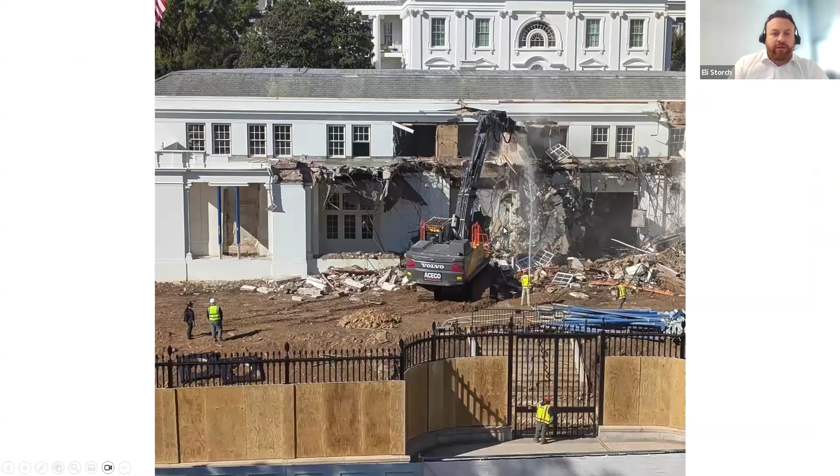George Claflen, can you unmute? Oh my gosh, no, this is great. George, you're muted. I'm on mute, all right. Oh, there you are, George. We hear you. You want me to talk or you want to talk, Eli? No, you go for it. Okay.

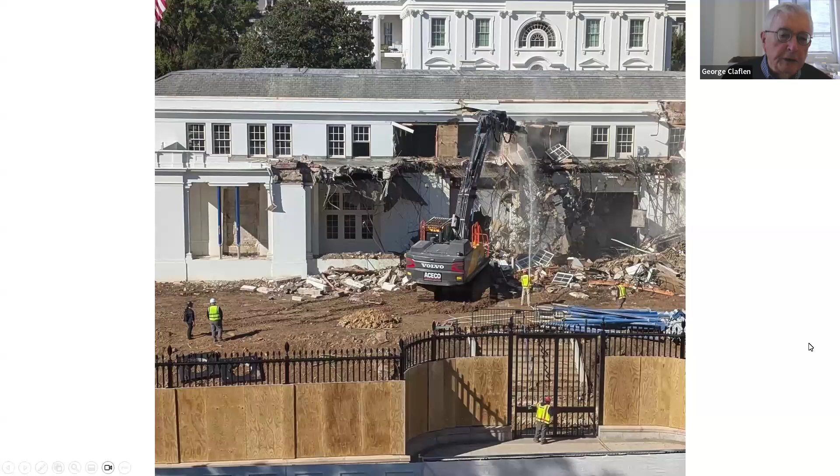I think everybody's aware of what's going on in Washington. This is not the time to debate it in some detail, but I think the physical presence of what is actually happening there is worthy of noting in our group that is so visually oriented.

I think there's another slide that shows a diagram, a very crude diagram of the East Wing. The big yellow oblong is the new ballroom, as it's called, that dwarfs the White House in terms of square footage. I think even that little oblong is less big than the actual proposed building. If the White House were in Philadelphia, I don't think they would have even gotten a demolition permit. But apparently things are not as strict in Washington as we think they are, at least when it comes to the White House. So I'll just go on from there.

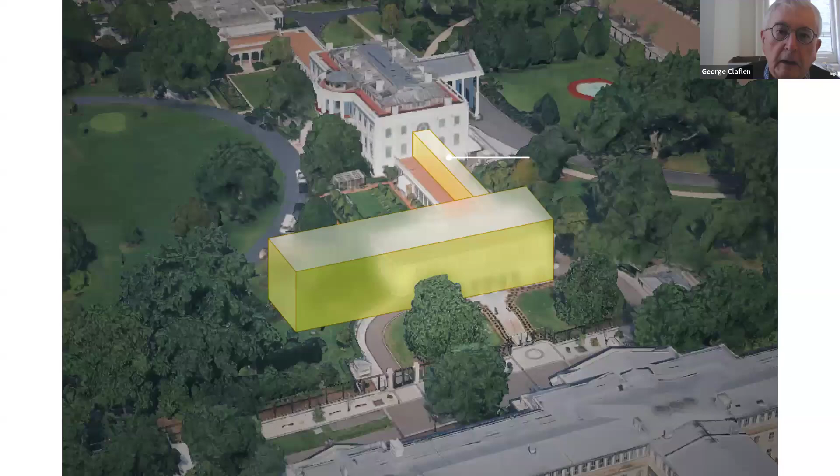Another non-visual item, very interesting, is that the mayor has basically ousted Herb Wetzel, who was the longtime planning director of council's planning arm, and was also head of the land bank. The chair of the land bank is now Angela Brooks, who came to DAG. We had a one-on-one with her in May. She is the chief housing officer of Philadelphia, and the expectation is that the land bank will be much more favorable to subsidized and workforce housing now that the leadership has changed.

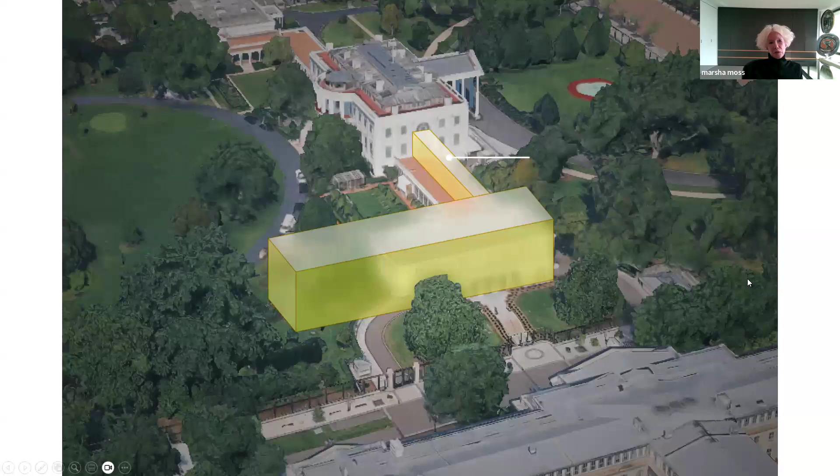Thanks, Eli. I'd like to say a few words about next month's program. The Trump administration is seeking to retell the story of America's founding, issuing an order to restore truth and sanity to American history. This is urgent because Philadelphia will host hundreds of thousands of tourists next year for our 250th anniversary, so much attention will be on our city. In his effort to whitewash American history, Trump is seeking to erase the history of slavery. The President's House educates visitors about Washington's ties to slavery and is a memorial to those enslaved there. Although it has been targeted for removal and alteration, so far the displays remain in place, fingers crossed.

The establishment of the President's House, its recent threat, and its future will be explored by our two speakers: lawyer and activist Michael Coard, founding member of ATAC, Avenging the Ancestors Coalition, and Troy Leonard, principal of Kelly Maiello Architects, designers of the President's House and Memorial. Together they'll discuss challenges to the site's integrity and predictions. The event is in person at 1218 Arch Street on November 12th at 5:30 in the evening.

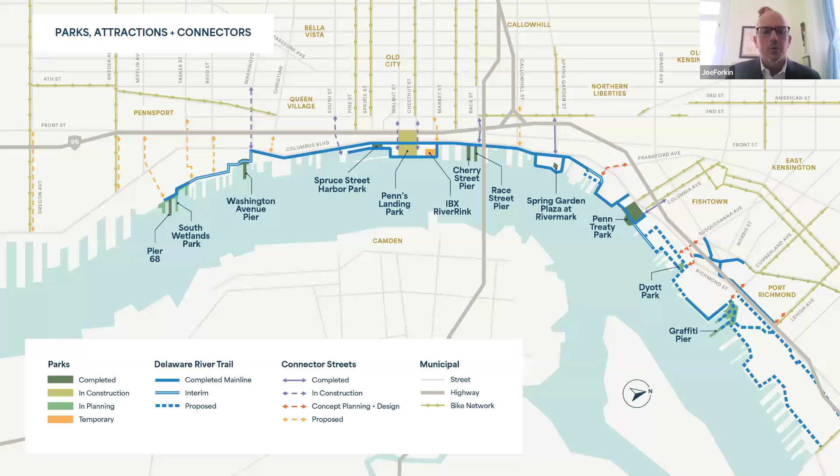By building out that public realm, we then lure private investment to the waterfront. The trail, since it's been built, has attracted about 1.7 million trips. This is amazing to me. I've been on the waterfront for 28 years now, and every park, every connector street, and every trail segment we open continues to impress me in terms of the use it receives, how it falls so seamlessly into the fabric of the city once it's open for everyone to use.

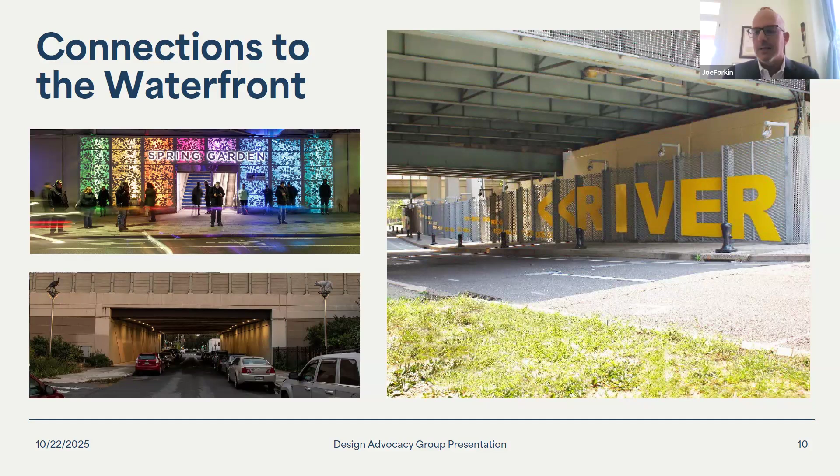And then the connections to the waterfront—before we started working here, each street, each connector was completely disconnected. It was a place you did not want to walk through. You did not know the river was on the other side of it. So this connector street program was very important in breaching that physical and psychological barrier of I-95, attracting bicyclists, pedestrians, joggers, and the upland neighborhoods back to the river, so they knew that asset could be explored and it was theirs.

Some of the activations we do on the waterfront—I'll run through a couple fast ones here. Cherry Street Pier is a historic pier built in 1919, about 55,000 square feet, testament to the shipping prowess of Philadelphia historically. We went through a lot of ideas about what Cherry Street Pier could be. It was called Pier 9, Municipal Pier 9 originally.

The other is the Blue Cross River Rink, with both Summerfest and Winterfest. Again, this is a temporary activation meant to show a recreational side to the waterfront—what can be attracted here, how families both within the city of Philadelphia and regionally can approach the waterfront from different perspectives. And Spruce Street Harbor Park, as Nate alluded to, has become a beloved attraction in the summertime for the city of Philadelphia.

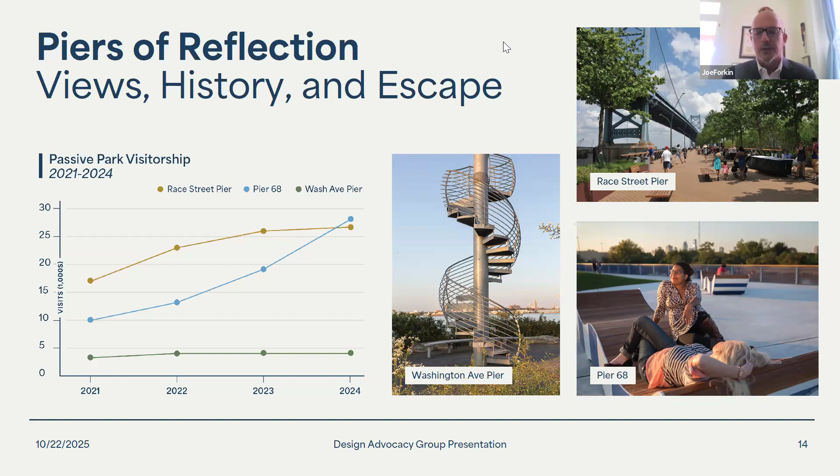Washington Avenue Pier, the former immigration station for the city of Philadelphia, has developed into a wonderful ecological park. The artwork there is called Land Buoy by artist Jody Pinto to commemorate that. Race Street Pier, one of our first initiatives, is a passive park known for its quiet, and the yoga and health and wellness programs that happen there. And Pier 68, a park down in the future wetlands park we'll talk about in a moment—again a passive space reflecting what the people wanted to do in that area.

So all of that combined—the creation of the parks, the connector streets, activating the waterfront—all of that is playing into this proof of concept: if we lead with the public realm, if we lead with people-forward engagement, private investment will start to follow and fill out the waterfront. That's the strategy. That's the idea in each park we build, each trail segment, each activation or program put on the waterfront—meant to attract investment.

So to date, it's probably a little more than this right now, but we've completed about 12 projects and have invested with our partners—government, philanthropic, and private—$100 million into public realm projects or infrastructure projects on the waterfront. We have 6 other major projects underway that we'll talk about, in various states of design, planning, and construction.

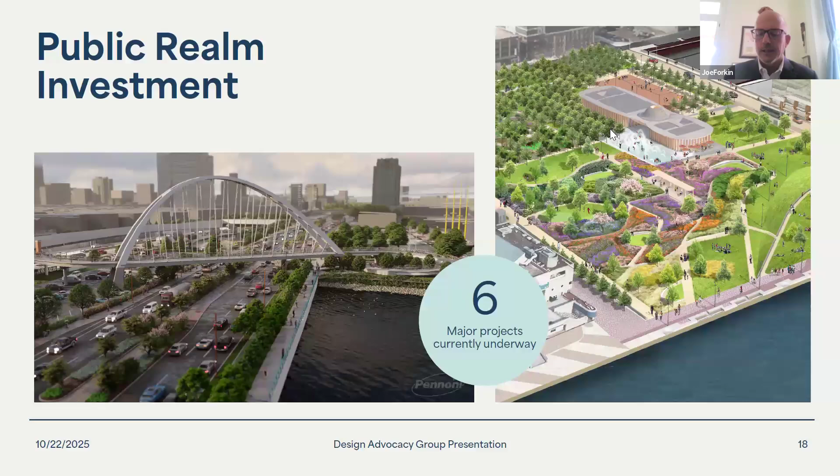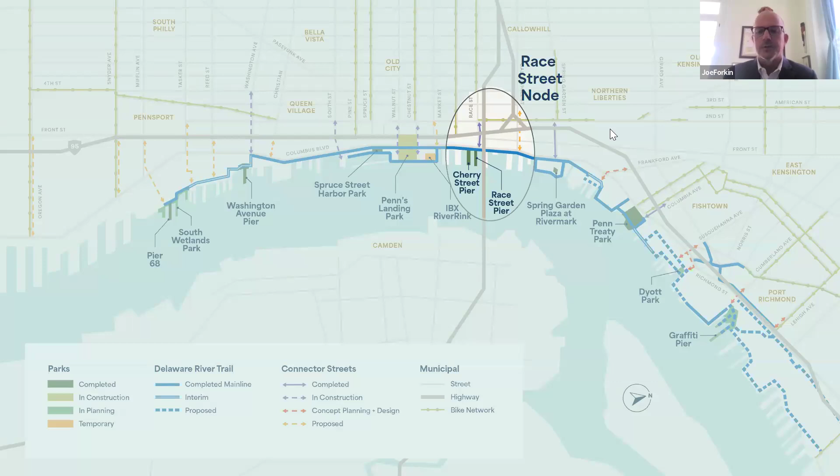As a case for this concept, the public realm leads the way and private investment follows. The case study we had in the earliest improvements was the Race Street node, which has three public improvements: the Race Street Pier, about a $7 million investment; the Race Street Connector, connecting the upland neighborhood directly to that park and asset, roughly a $3 million project; and Cherry Street Pier, phase 1 of $5 million.

So as we look at it, could we prove the concept that public realm would then turn around and create private investment? We see just in that node that there's $154 million of private investment that followed the public infrastructure we created on the ground. It's a 10-to-1 return on investment from public to private here.

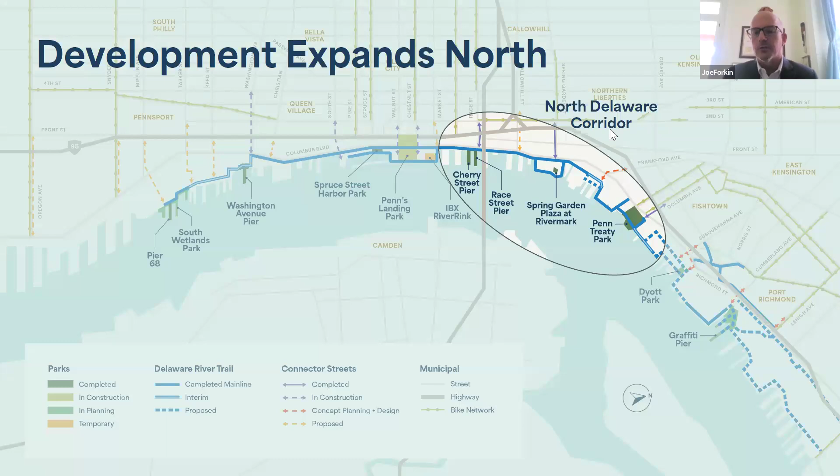You're probably familiar with all of these: Fringe Arts, One Water, 205 Race, and Morgan's Pier. And then that energy, as the trail developed and everything started to develop, started to push north, so from roughly Race Street to Penn Treaty Park there's further investment that has happened on the waterfront.

About 1,100 residential units have been added, $1 billion of investment. The North Bank site in Fishtown, Port Richmond is open. The battery site, preserving that wonderful Delaware generating station adjacent to Penn Treaty Park, is open, about a $482 million project.

And one that's very close to our hearts, especially mine, is the Rivermark Northern Liberties development, about a $224 million development. I always tell this story, but when I started working on the waterfront, that was the East Central incinerator site and the impoundment lot for the city of Philadelphia.

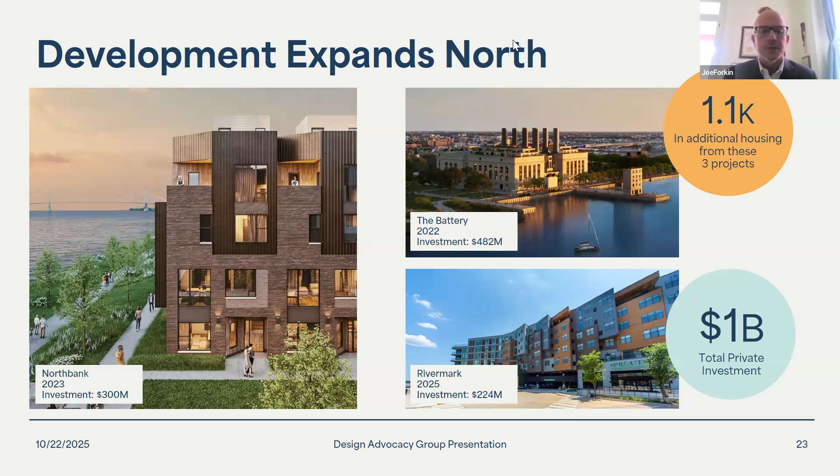So if you got too many tickets, your car was taken to the site. That site went through many iterations. We completely remediated it environmentally with the Army Corps of Engineers and the DEP. It became Festival Pier, hosting large national concerts for a while, and then a private development group we partnered with came in. I'm really happy to say Rivermark is now open and thriving, about 52% leased as we speak.

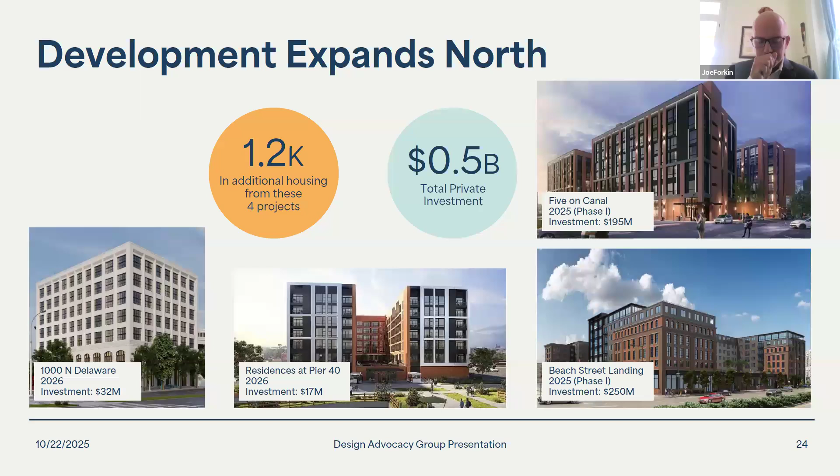And then just on the west side of Delaware Avenue, as that energy was pushing northward, you can see these other developments. Another 1,200 residential units and about $500 million of investment are taking place on the west side of Delaware Avenue, adjacent to what's happening on the riverside.

Going forward now, thinking about how that northern stretch of the Delaware River is really starting to fit out, the trail is connecting up through the parks there, and private development is really reshaping the streetscape and the energy within the waterfront.

There are projects - again this is a concept project, and I know this is one of the areas DAG was interested in - the Wharton Piers project down near Washington Avenue. This is a proposal right now that's met with, I think, some community approval. The plans have been submitted to the city of Philadelphia. This would be about a 600 resident tower. It's exciting for us to see the development there, and hopefully something like this can go forward in South Philadelphia.

What's also exciting for us is that through the zoning code and the Central Delaware overlay, which attempts to codify the master plan for the Central Delaware into law, there's a bonus system. Part of that bonus system for height on a building is that the private developer can build out some of the public realm.

In this case, it will be a trail connection. We have a temporary trail connection for the Delaware River Trail from Washington Avenue to roughly Reed Street, and then we pick up with the permanent trail again. This development, if it goes forward, relies on that bonus to build out the permanent trail segment running from Washington Avenue to Reed Street. So private development coupled with public investment can continue to fit out the public realm and that quality space along the waterfront.

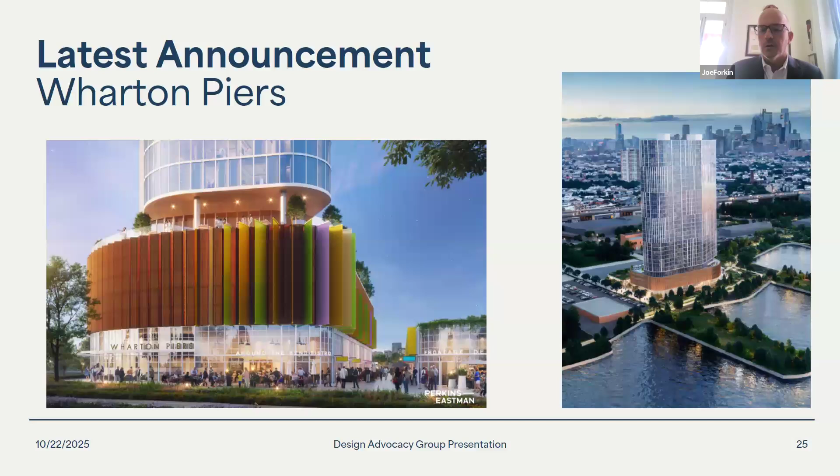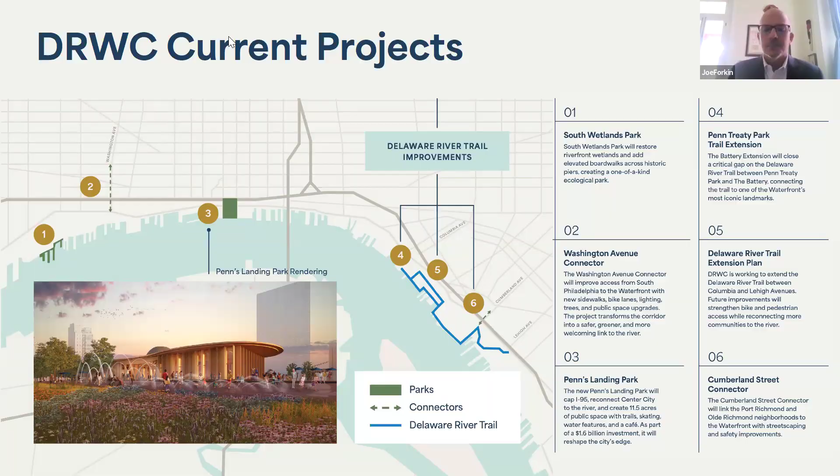But first up is the most significant development in the south. This is an ecological park, South Wetlands Park, and I may tag Lizzie in to do some of this.

Yeah, sure. The South Wetlands Park is a concept that was directly conceived of in the master plan for the Central Delaware when looking at this series of finger piers in South Philadelphia that had been abandoned for decades and were really returning to nature.

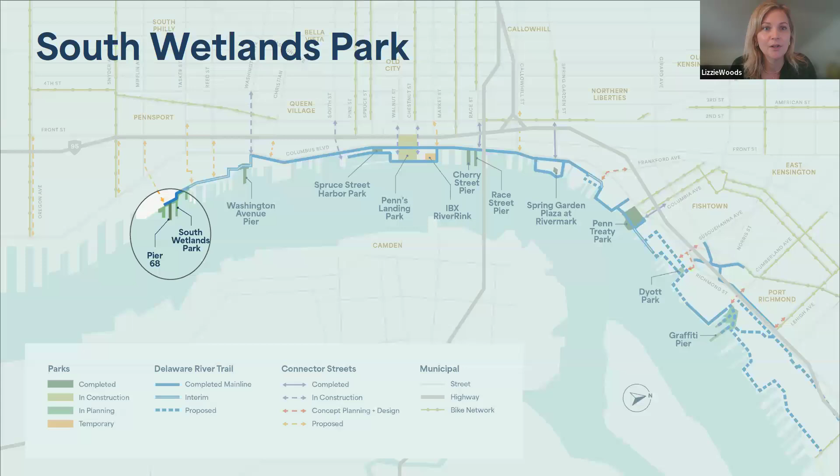The idea was that they were providing already some valuable habitat, especially for juvenile and spawning fish species in the Delaware. The concept was what could be done to help encourage that kind of ecological uplift while also providing new forms of public access on what was a highly industrialized waterfront, what could be done to provide a combination of public access and ecological improvement.

So DRWC acquired these 4 piers you see here adjacent to the Walmart shopping center in South Philadelphia, and came up with this concept of improving the habitat there through strategic removal of some sections of the piers and stabilization of the remaining piers, the construction of boardwalks that would link these spaces for public access, and also work to attenuate some of the wave action in the berths to improve the ability of those areas to sustain plant growth and other forms of habitat there.

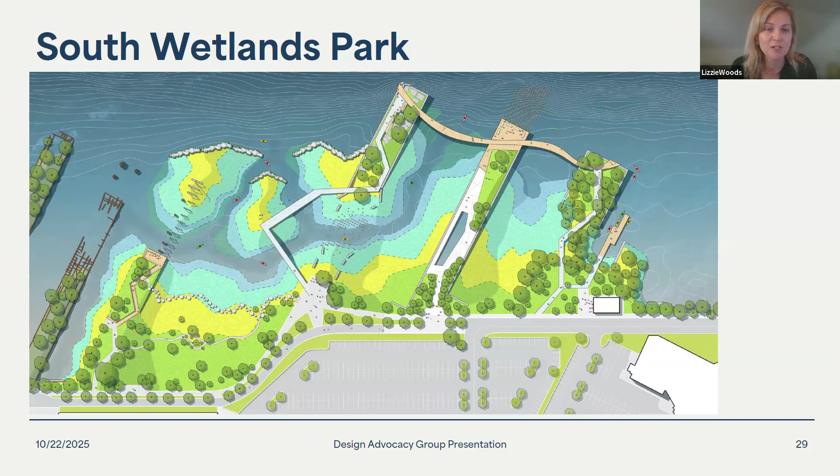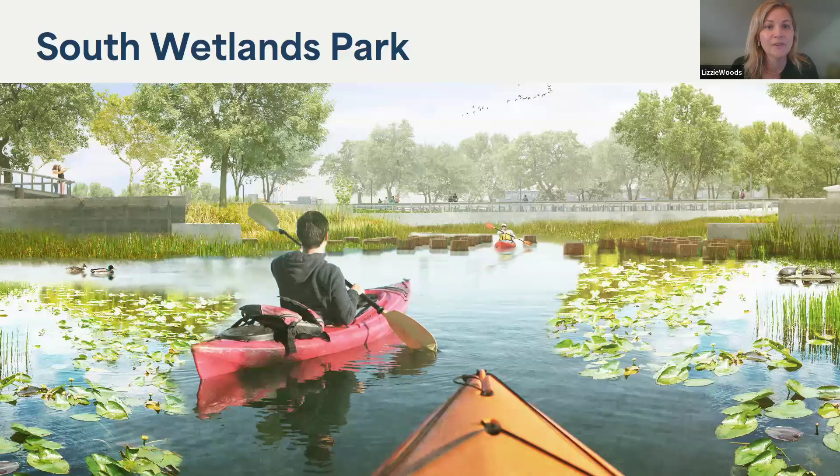This project has been through a lot of revision, and I think based on close coordination with the regulatory agencies that oversee these things, I'm happy to say that this is currently before seeking its joint permit from the Army Corps of Engineers and the DEP. But we have some fun renderings here of what this could look like, and we're in active fundraising for the first phase of construction, which would focus on the southern portion of this area around Pier 70 and linking it to the open park at Pier 68.

Long term, we would love to see some opportunities for actual recreation in the water, so we have plans for a kayak launch down here. This is part of an effort DRWC is involved in with other partners along the waterfront to look at ways of improving in-water recreational opportunities for folks in the Delaware.

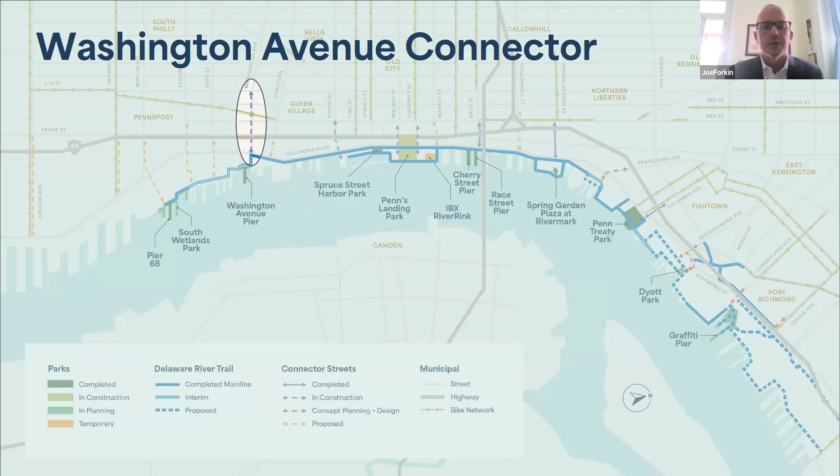That's great, thanks Lizzie. Next one up is one in construction right now, maybe not as ambitious as the South Wetlands Park, but the Washington Avenue connector project, which is a big connector project for us. There's a larger connector streets on the waterfront, Spring Garden being one that is complete from 2nd Street to the riverfront. But Washington Avenue, we were asked by the city of Philadelphia to take a broader look at Washington Avenue and how the connections to the waterfront can be improved from 4th Street to the waterfront.

So this is the illustrative map of that. Lizzie, you can walk through some of what we're trying to do to reconnect that. Yeah, this is the overall full concept build of the Washington Avenue connector, really focused on 2 main ideas. One is traffic safety improvements, and the other is greening.

So the construction that's underway right now is really focused on the traffic and transportation improvements. We're building out a protected shared use path along the southern side of the avenue that would run all the way from Columbus Boulevard to 4th Street and link into the bicycle network west of there at 4th. And at each intersection, doing curb bump outs, doing median islands as well, and making improvements to the traffic signals along here to improve pedestrian and bicycle safety along this corridor.

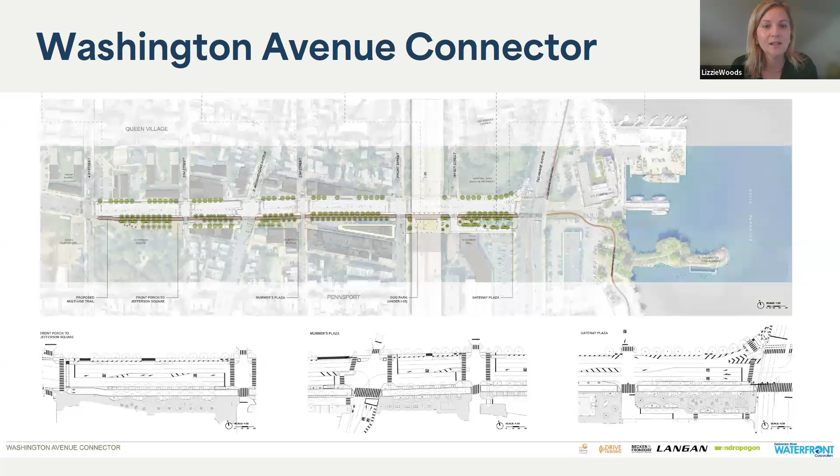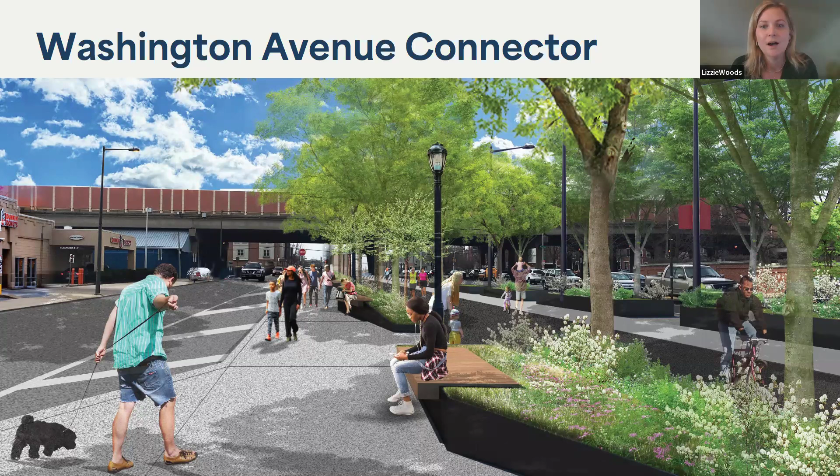And then in key places, particularly at Jefferson Square, at 4th Street, between 3rd and 4th Street, and then here, as you see in this rendering at Columbus Boulevard, creating areas of what we're calling plazas or gateways by focusing on some improved landscaping and seating. The full build has some plans for under I-95 as well that we are looking to do in future phases.

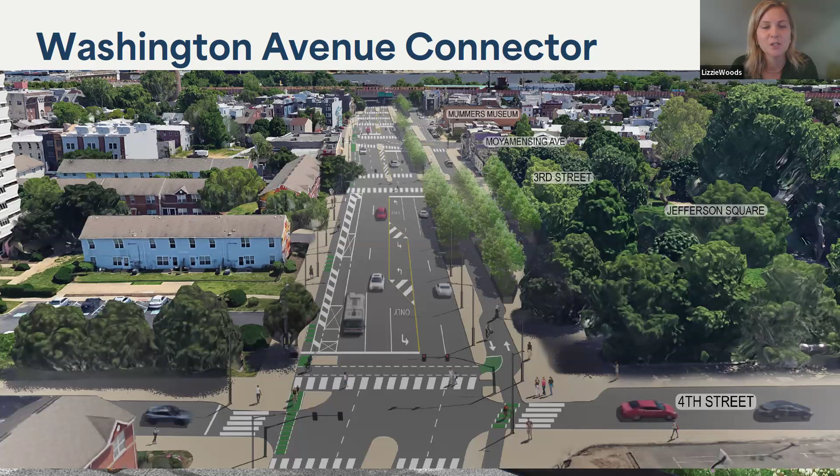But we're very excited about the pedestrian and bicycle safety improvements that will be made as part of this project, which, as Joe mentioned, and as you can see in these photos, is currently under construction. We are anticipating it being complete in late spring or early summer of next year.

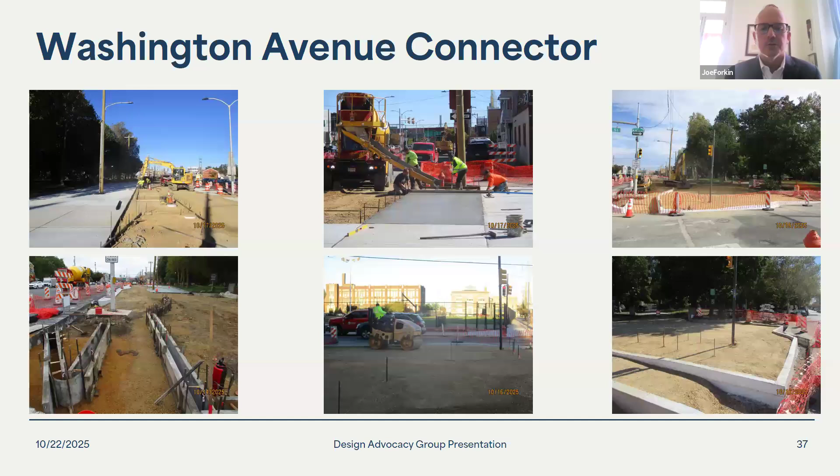Again, all this goes back to Washington Ave. The concept and theory was that the Race Street node, as a proof of concept, would expand southward through these connections. The park sits at the Washington Avenue Pier, Pier 68, and the future South Wetlands Park. This is the upland connector that then connects into the trail network. That network of public realm, we're hoping, really incentivizes private development in the South Philadelphia area. The first example we showed was the Wharton Piers. We're hopeful something like that develops, along with further redevelopment of the waterfront connection back into South Philadelphia and the city as a whole.

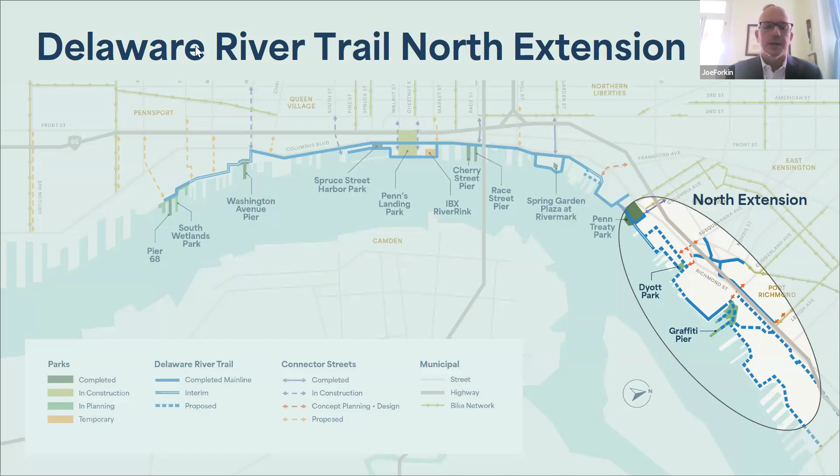Moving northward is the extension of the Delaware River Trail into the upper Port Richmond area, connecting to Allegheny Avenue. The first connection has to do with linking Penn Treaty Park through the Battery site. The Delaware River Trail currently runs up into Penn Treaty Park, then hits a gate, a fence, a wall — the changing landscape there in height — to connect into the Battery site, where we already have a trail condition.

So Lizzie, I don't know if you want to give a little info about the timing. Yeah, this is a project I like to call small but mighty. It's only 100 feet of trail section, but it will make a huge improvement in the accessibility of the trail between the public space at Penn Treaty Park and the private development at the Battery. The design is complete, and we're now going through our federally required environmental review process, which is always a beast, even for a project this small. The current status of the federal government is putting even more pause on it. We were hoping to be under construction this fall — that might be pushed to early spring — but it's a small project, and we're still expecting it to be done by late spring of next year.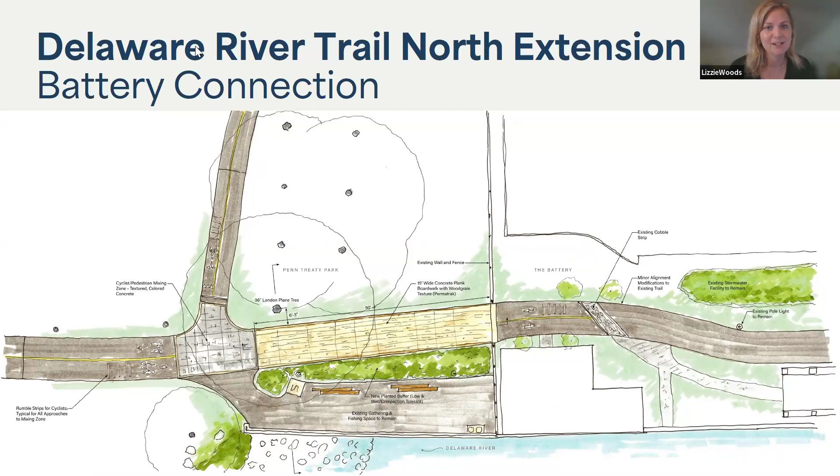That's great. And then we get into the big guy — the largest project we've undertaken to date, Penn's Landing Park, which is roughly about a $500 million project at this point.

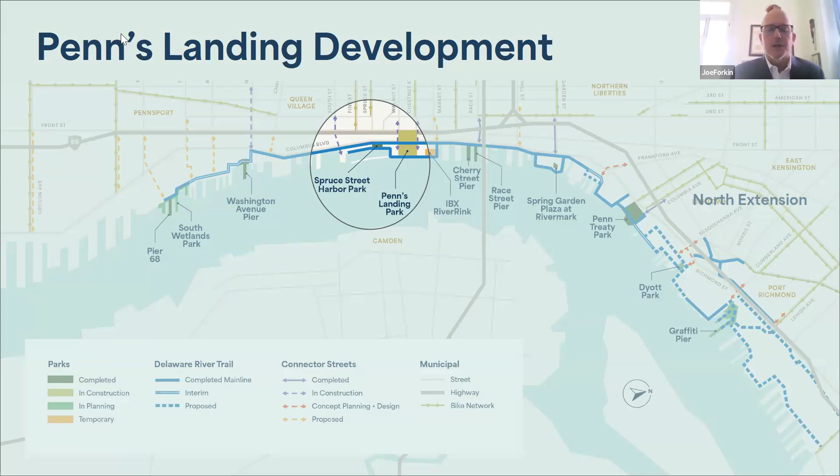Here's one of the first infrastructure improvements that will be standing up, we think, next year — the extension of the South Street pedestrian bridge from where it currently lands in a parking lot on the west side of Delaware Avenue. Why it lands in a parking lot, I have no idea. But it's a very iconic structure that would finally reconnect the South Street district to the waterfront. It lands at the terminus of the former Chart House site.

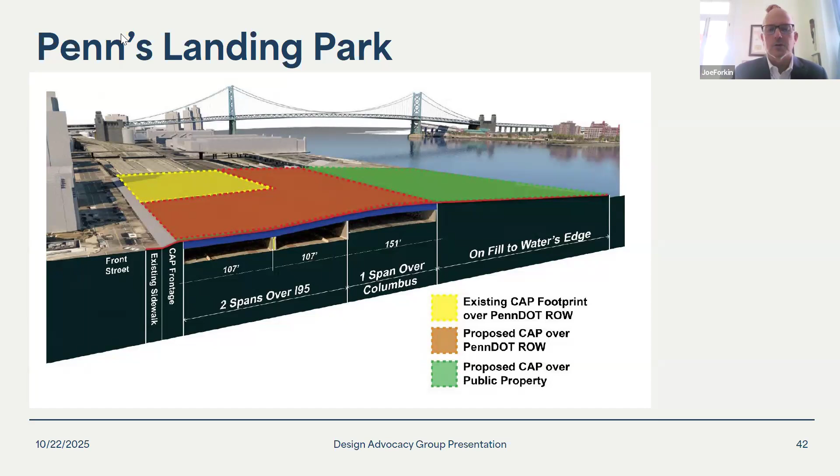And then the big project, which is both the cap and cover for Penn's Landing Park. You've probably seen some of these slides before, showing the geometry and engineering that went into reconnecting the historic core of the city and the waterfront again. So this is the rendering — this is what it will look like. Twelve acres, roughly, with different amenities spread out.

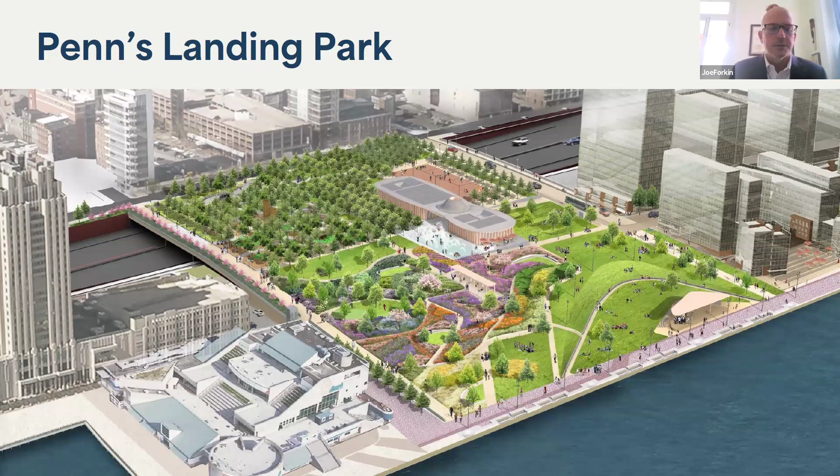I'll show a bunch of renderings for this project. This is well underway. We have wonderful partners in PennDOT, the city of Philadelphia, and our philanthropic partners through the William Penn Foundation, the Knight Foundation, and the Pew Charitable Trusts, who have all come together to help fund this massive infrastructure improvement to reconnect the center of the waterfront to the city.

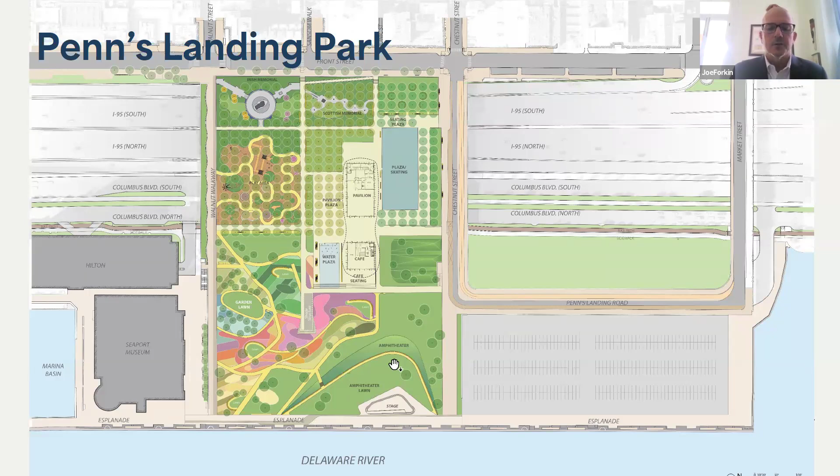Programmatically, this is what the park looks like. There's a development site here, and another development site in what we call the basin site, adjacent to the Penn's Landing Marina. Overall, programmatically, it places a lot of the activity people have come to love about the waterfront — the ice skating rink, the events at the stage area, the multicultural events — and as a centerpiece, creates a pavilion and cafe area as the hub of the park, which extends out to the playgrounds, the spray grounds, the gathering space for the rink, the amphitheater space, and the Knights Common Gardens, which we'll go through.

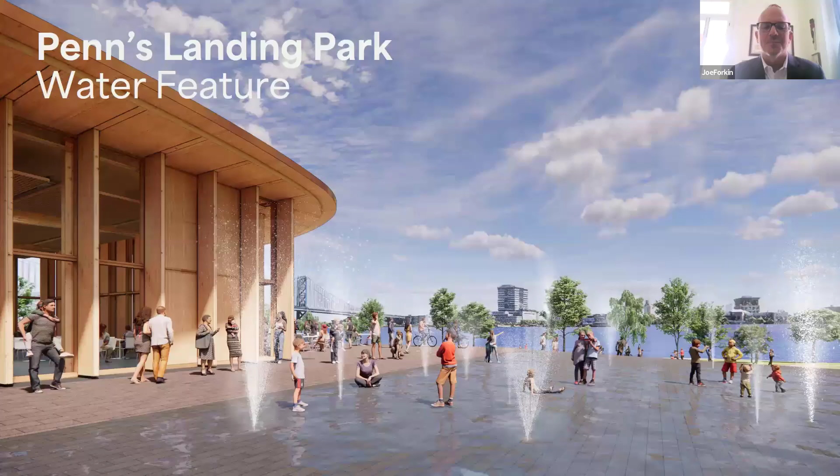So this is the Kieran Timberlake-designed pavilion and cafe. Right now it's a mass timber structure, not yet built — PennDOT's still working on it. We'll go through some renderings of what the park will look like once completed. These are the spray grounds adjacent to it, and a view looking roughly from Walnut Street, or where the current ferry terminal dock is, looking back west toward the city, with the different gardens.

Karen and Lizzie, hop in anywhere if you want to talk about these renderings — we've all seen them a number of times. Do you want to describe the Woodlands Playground?

Yeah, we can talk a little bit about it. I think, to Joe's point, the overall goal of this project in terms of the program of the park was to include as much of the program that people had come to love about Penn's Landing. Penn's Landing has a decades-long history of being a civic gathering space for the city, and we were very conscious of needing and wanting to maintain that.

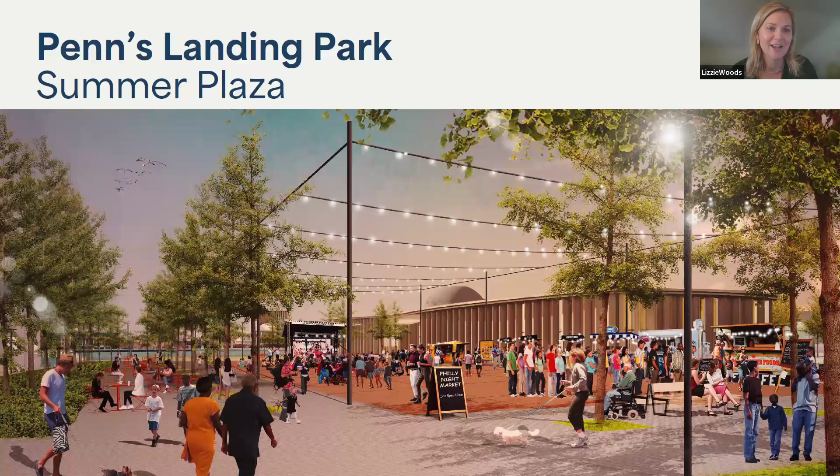So still having amphitheater space for big concerts and festivals, still having that ice skating rink with opportunities for summer programming as well, but then adding in program elements that would make it more of a year-round and daily destination. So it could accommodate you coming down for a big event with 10,000 of your friends on a Saturday in June, but also coming down on a Tuesday afternoon in October to a beautiful garden space where you could rest and relax.

The design has a playground, as you saw, taking inspiration from the Pennsylvania woodlands, using all custom equipment that speaks to that, like a giant spider, a giant ant that kids can play in, high towers with slides and ropes and all kinds of fun things like that. Fully accessible as well for people of all ages and abilities.

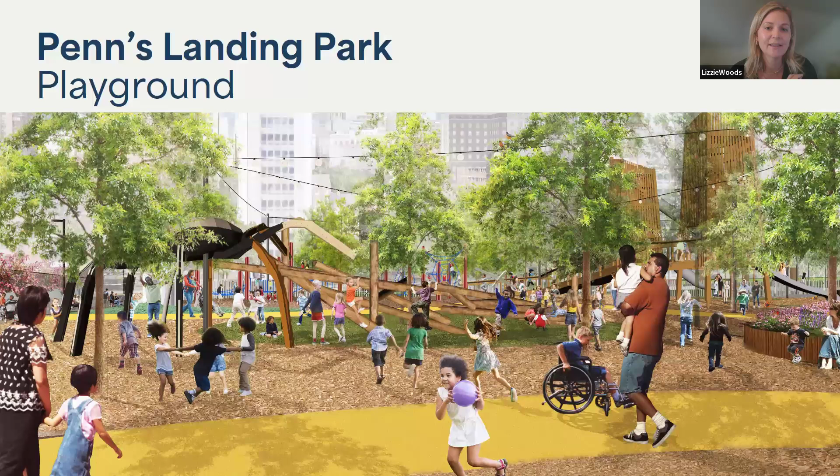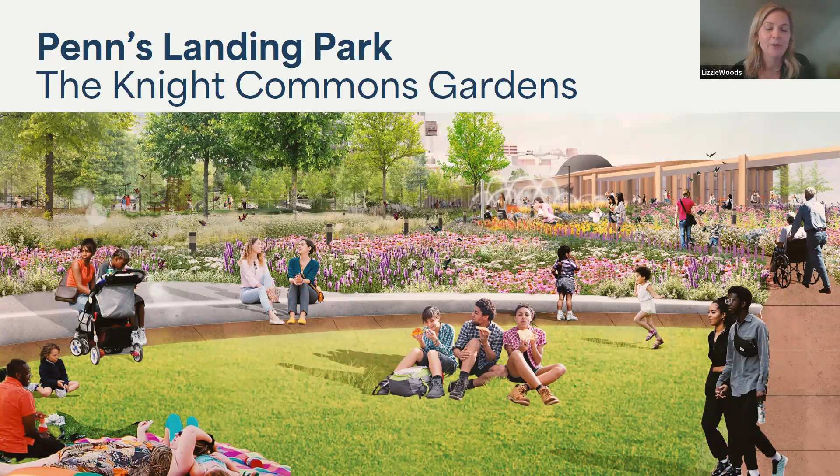The garden spaces, as I mentioned, really focus on native plants and pollinator-friendly species to create a dynamic ecological and horticultural component to this project, with smaller nodes cut in that can host programming of lots of different scales. So it doesn't have to be a huge festival that happens here, it can be a small community gathering space as well. Lots of other spaces built throughout the park that can be flexible and host a range of different activities that people might want to see here.